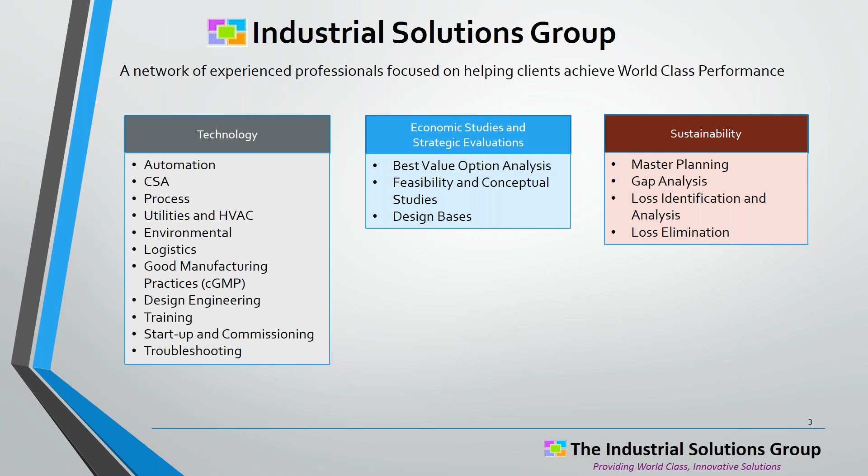Sustainability is one of those words that not many people talked about 20 years ago, but now everybody talks about it. You can't deal with an organization, a government agency that doesn't deal with sustainability, and everybody's got their own definition. I've just put a few on the list.

Many of our customers think in terms of sustainability kind of in the old engineering fashion, where sustainability has to do with reducing energy costs, carbon footprints, water. Certainly that's a part of sustainability, but notice that in the public sector, the definition of sustainability has gotten much larger. People talk about the total employee, community, product safety. United Nations deals with better quality of life for all. National Council for Advanced Manufacturing, of course, brings in the concept of it's got to be economically sound and safe.

So we've endorsed that broader sense of sustainability, but have summarized it in a few bullet points. If you want to be a sustainable world-class manufacturer, you need to do things safely. It's got to be safe for the equipment. That falls into a broad engineering category of process safety, pressure vessels, making sure things don't corrode, that they're safe to operate, that the equipment doesn't damage others, doesn't damage itself.

Employees, industrial hygiene and safety, very important. Many manufacturers have departments for a number of years, decades, that have been focused on employees, and they should. And then, of course, safety for the community, environmental laws, various regulations. We need to make sure that our communities, if we're manufacturing next to them, are safe.

The second broad category has to do with quality. It makes no sense to manufacture products that go out the door with a quality defect. Recalls are very expensive, but potentially even worse than that, defective products can actually cause harm to people. We've had recent examples of the romaine lettuce, potential contamination. So product defects do happen, and it's of utmost concern.

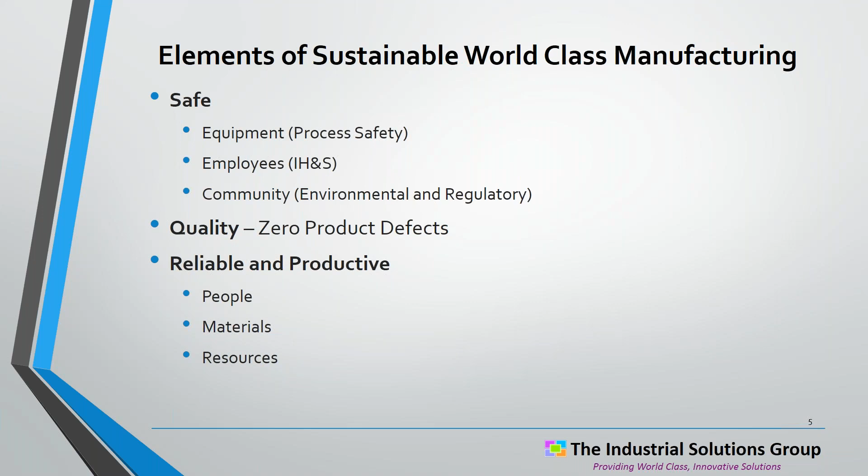And then finally, and we'll be focusing much on this area, reliable and productive manufacturing. And that means that you're optimizing the use of all of your resources, people, materials, energy, water certainly are part of that.

So why is sustainability so popular? I think there are several reasons for it. One, it goes well beyond just cost savings. Sustainable manufacturers provide an image that's very important to a significant segment of the public. It is important to consumers around the world that they know that the products that they're buying are providing optimal use of energy, not warming the globe, etc.

So it's very important if you want to sell products in the public sector that you can check off the sustainability block. Also, from a competitive standpoint, as we'll go through this, sustainability saves money. It increases productivity, it reduces costs. So if you want to have stable manufacturing sites, you need to be able to be competitive. And this sustainability idea is a key way of getting there.

It makes it easier to meet regulations. Folks can get out of the compliance mode and actually meet the spirit of what the regulations mean and be very proactive. And that also sends a very healthy signal to your customers and your employees. It helps you attract good employees. There's a pride in being part of the best. When sports teams get into the postseason, it's hard work, but they have a lot more fun being part of a winning team than being part of the group of teams that are watching the winning teams on TV.

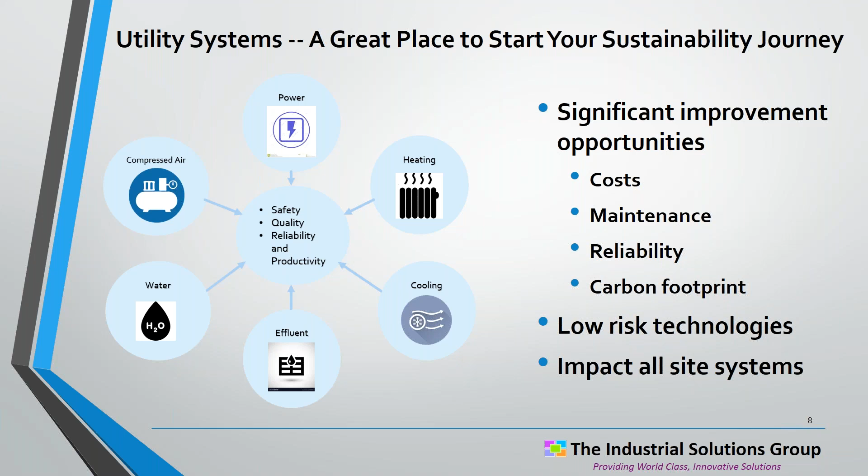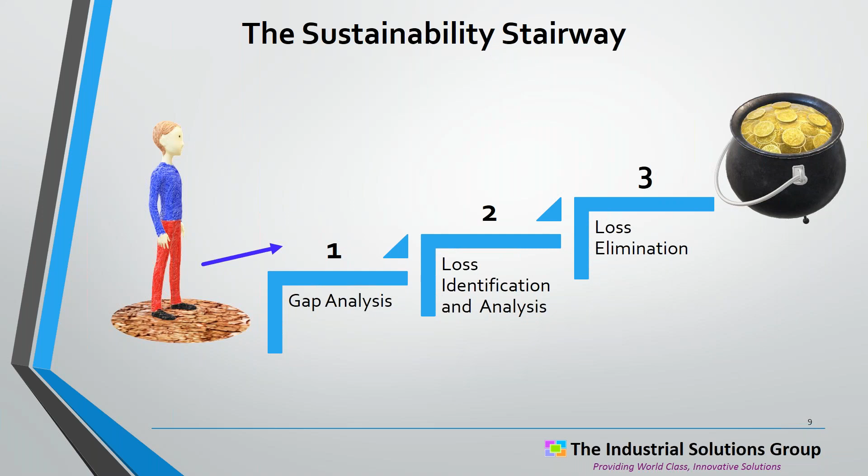So how do we deal with sustainability? It's just a few steps. First, it's nice to know how much opportunity there is - we've referred to that as a gap analysis. Second, once we know what the opportunity is, then we can dig into the losses that are causing this gap, where we're at versus where we want to be. And then third, and the most important step, is actually eliminate the losses. We'll be talking about each of these three steps over the next several minutes.

So let's talk about the gap analysis. Some people refer to this as the size of the prize - we're determining the size of the prize. We know there's money to be made based on our history with utility systems, but is it a little bit, is it a fair amount, or is it a whole bunch? It's kind of nice to know going in, because that helps to set priorities around the plant, helps to focus the teams that are identifying and eliminating losses.

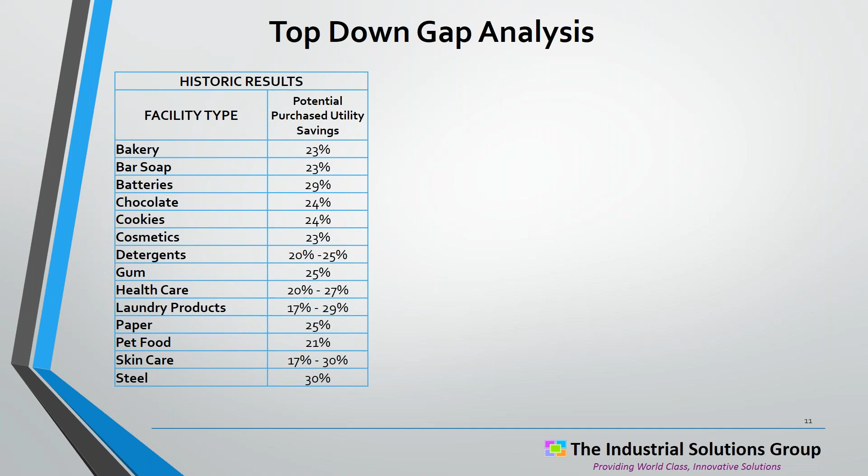And fortunately, you can do this pretty quickly. It doesn't take a lot of effort to get your arms around how big this gap is. I've listed here historic results - we've done dozens of loss analyses for a variety of different companies, and here are some ranges of the typical savings that we will get and we have found. So these are some actual results.

And it's real easy to use this top-down analysis. Imagine you had a paper department that spends $1.5 million per year on purchased utilities. Now if you wanted to, you could add maybe labor, maintenance, and operating costs to that, but we'll keep things simple in this webinar and deal with purchased utilities. Well, you go down the chart and you look at paper, and we said, yep, we do paper, we're seeing about 25%. 25% of $1.5 million is $375,000 per year.

So that's the size of the prize. You might have a little bit less if you've been very active on sustainability, or more depending on what your payout requirements are and how aggressive your company has been at funding sustainability.

So this top-down analysis can happen very quickly. All you need to know is what your current costs are, but the problem with it is it's using some historic averages that may or may not be relevant to your particular site.

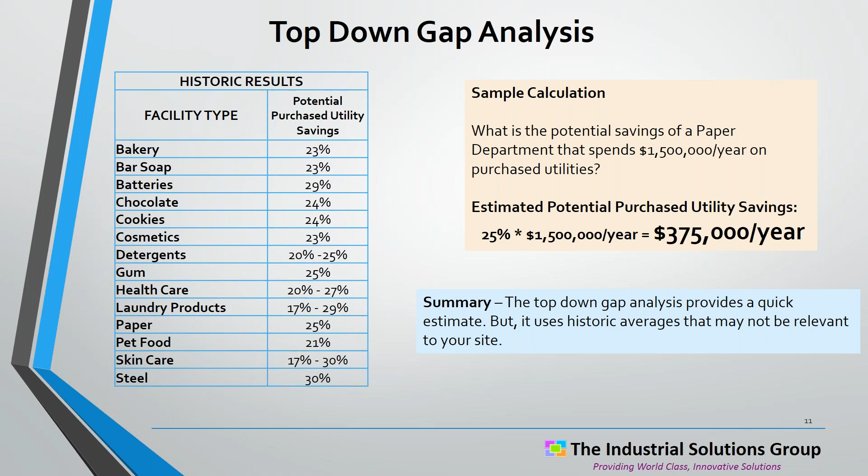So to deal with that problem, I also like to come at it from a bottom-up gap analysis. It takes a little bit more effort, but we are getting some information that's specific to your particular site.

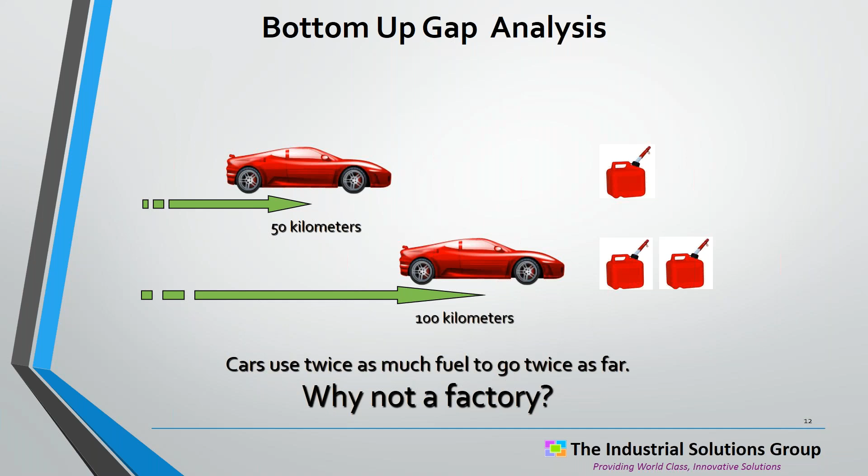So we'll take this in a few steps. Let's say that you have a car and you're taking a trip, going 50 kilometers, and it takes a can of gas to get there. If I drive that car 100 kilometers, I would expect to use 2 cans of gas. Go twice as far, I use twice as much fuel. So in general terms, why wouldn't a factory be the same?

We can graph what we just talked about with our cars. On the y-axis, we look at fuel used - cans of gas, 1 can, 2 cans. On the x-axis, we've got the distance traveled, number of kilometers. You can see that we've got a straight line. If we don't go anywhere, we don't use any fuel - that's down at the 0 point. If we go 50 kilometers, we use 1 can of gas. If we go 100 kilometers, we use 2 cans of gas. So real basic, simple concept.

Part of the concept is how much you use, but I put an X prime point in here to demonstrate how just a little bit of knowledge can start the wheels turning on how to improve your plant, and this starts leading into world-class sustainability thinking. So you could ask yourself, what happens if I take the next trip to the same place?

I go 50 kilometers, but 1 can of gas doesn't get me there. I find out that I used 10 or 20% more. Well, if I'm driving my car and my gas mileage is down, it makes me start to think - maybe my air filters aren't working very well. Maybe I shouldn't have switched to that lower cost brand of fuel that has more ethanol in it. Maybe it's really not that good of a deal for me. Perhaps something else is happening - maybe a brake is dragging.

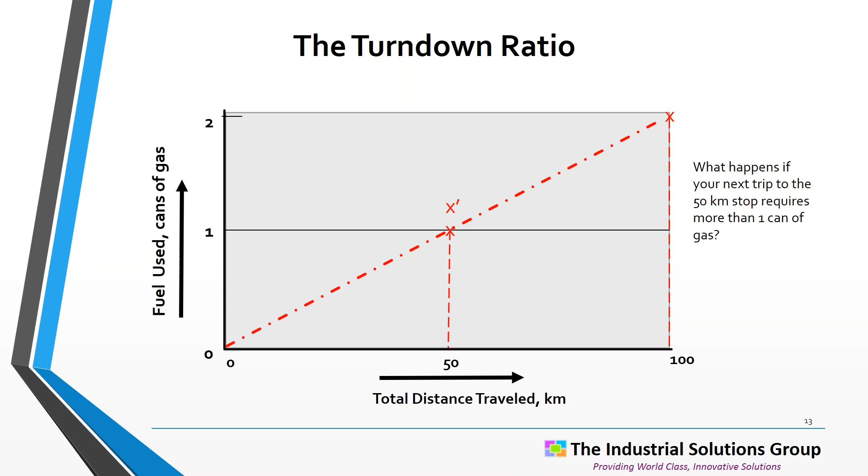And if I can catch it early, an ounce of prevention is worth a pound of cure. I can fix small problems like an air filter easily. But if I go on a trip with a clogged air filter, I might be stranded someplace, and now I've got tow truck charges, I've delayed, and I haven't gotten to an important event on time. Problems can steamroll, and that's what we want to avoid in a sustainable plant.

Before we get into the rest of this bottom-up gap analysis, I need to introduce a couple of definitions. What do we mean by loss? In my definition, we take a very broad definition - if you can't see what you're putting into something as part of the end product, the finished product, then it's a loss. And that actually often happens with utility systems.

It's a very simplified explanation, but think of many of the manufacturing plants you've been around. The raw materials come in at ambient temperature, the finished product goes out at ambient temperature. What happens to all the fuel that you put into a plant? There's not more energy in the finished product. All the electricity - you can't see that in the finished product.

Instead, our utilities kind of act like processing aids, catalysts. We can't consume them - we don't consume energy, we don't consume water. So what we do is use it for a while, and then we're very efficient at discharging things through stacks, cooling towers, drains. We have a lot of ways of getting rid of this energy we can't use, and we'll be talking about why we get rid of it and when's the right time to get rid of it.

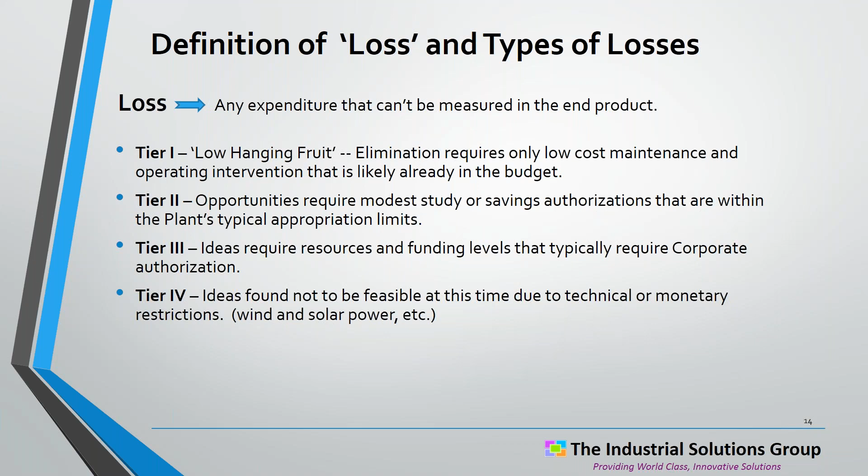When we go through, we also will classify some items as tier 4. Clients will say it's got to pay out in 2 or 3 years. Well, there are some good ideas out there that might be good for a university that's willing to accept 7 or 10 year paybacks, but aren't working quite as well in a manufacturing facility because without government help or some big breakthrough in technology, they don't meet requirements. We'll throw those in tier 4. We don't like to throw them away because we never know when a new law might be passed or something that would bring those tier 4 items back into the realm of feasibility.

We can talk about this turndown ratio, what we were just doing for the cars, in terms of a manufacturing plant. Instead of cans of gas on the y-axis, I've put utility usage units - could be kilowatt hours, millions of BTUs, gigajoules, or cubic meters of water. On the x-axis, we have production units. Everybody knows how much they produce every month - 4,000 widgets, 8,000 widgets.

And then we can look at the past 12 months of data, and we can plot those on an XY graph. One thing you may notice - remember we had this nice straight line when we were dealing with our car example - this is a typical scatter that you might get from your plant when you do this. Everything doesn't usually fit on a straight line. It's unusual that it fits on a straight line, but each of these would be real data points.

Notice there's one data point right here that, if we had a line from the 0,0 point and started rotating it up, this plant - with all of its existing equipment and all its existing production - proved to itself and its people that that month was a very efficient month for whatever reason. We don't know why, but without spending any major capital, that plant can operate there.

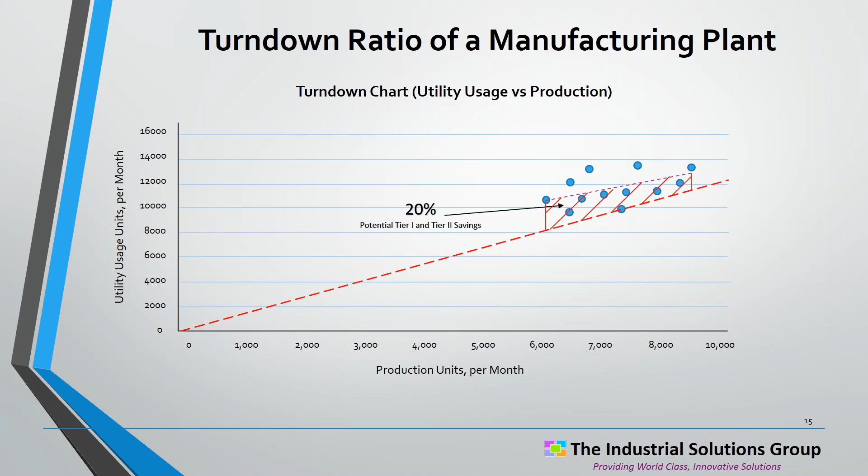So tier 1 and tier 2 items - this is kind of a picture of the kind of gap. Again, we don't know exactly what the problems are that are causing the gap, but we can see a picture here that this plant has some opportunities.

So we can take this a step further and do a little sample. Let's say this plant's production schedule for next year is 6,500 units per month. We can work through and use this bottom-up gap analysis to ask, what's the potential savings? How much would I expect if I went through this loss process?

Now I'll give you a couple of hints. We find that just because there's a gap, it doesn't mean you can get 100% of the way there - we usually divide that by 2. So we'll take those tier 1 and tier 2 savings and say it's pretty reasonable to get halfway there. If we're aggressive, maybe more. If things fall into place, maybe even more. But it's really hard to be perfect - though we don't have to be perfect to see some pretty significant savings.

And we also find that with tier 3 items, what happens is we can rotate this graph downward, so that we can get as many tier 3 savings as we can tier 1 and tier 2 savings.

Pretty easy calculation now. So at 6,500 units, the difference between the upper trend line and our ideal line is 11,500 units of utilities instead of 9,000 units. That's 128% of ideal. So we take that 28%, divide by 2, and add another 14%. Tier 3 equals tier 1 and 2. So it looks like that plant may have potential on that particular utility system to save about 28%. It's a good place to start.

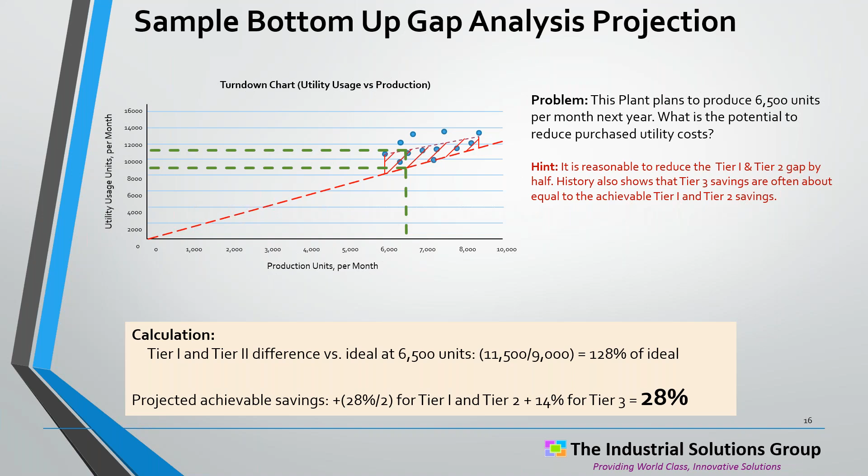So let's get into the loss analysis process. It's a 10-step process. First, we need to assign a site leader, identify the systems. We usually break it out, look at 10, 12 systems or so. And then we will select a team for each system, develop a treasure map that tells us how much money is being spent on each system.

And then it's an interview process. So we have teams, 3 to 5 people, on the steam system, on the HVAC, the others, and we'll spend a couple of hours in a room. We'll tour the systems, start getting ideas on changes that could be made to reduce cost. Then there's a period of quantifying the losses, revising, reviewing with folks, and developing an executive summary that gives a very detailed map of what the losses are and what the costs are.

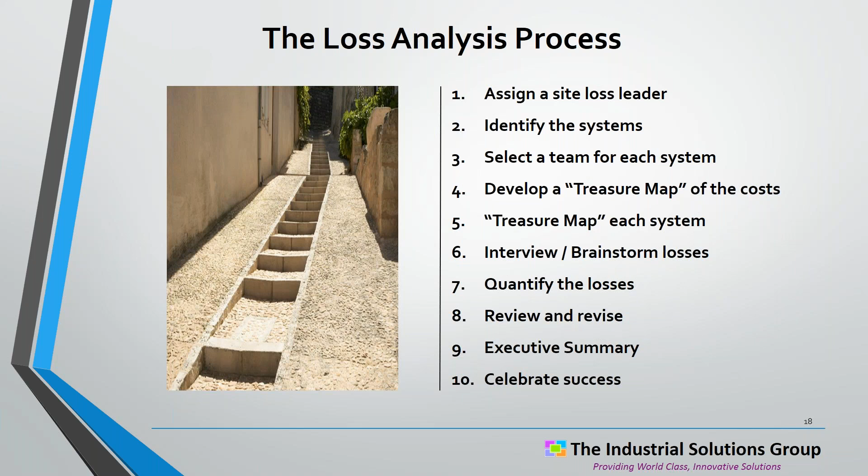And then it's very important to celebrate success. These are ideas that are hard to visualize, and a little pat on the back, a cup of coffee, something that says, hey, I appreciate the work done, goes a long way with building the morale that we're after with sustainable plants.

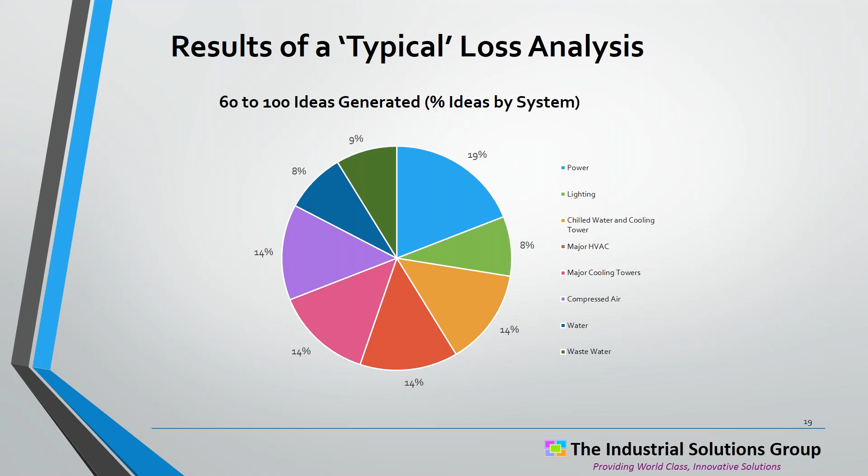Here's a pie chart. This actually came from a project that we did last year. It's pretty typical. Where are the opportunities? Every system has opportunities. 60 to 100 ideas, pretty typical.

So where do these savings come from? How is it that we put in systems, and we've done loss analysis on plants that are 3 years old, and where does the savings come from? I wanted to share a few keys from the technology that have helped me over the years to understand why we could get 25 or 30 or even more percent on some systems.

The first has to do with quality, and I'm not talking about quality of equipment, quality of people, or quality of training. Here, it's a thermodynamic principle. I'm dealing with quality of the energy or quality of the water that we are using. Many of our plants are set up so that it's easier to use higher quality than lower quality, and we don't worry about this at all.

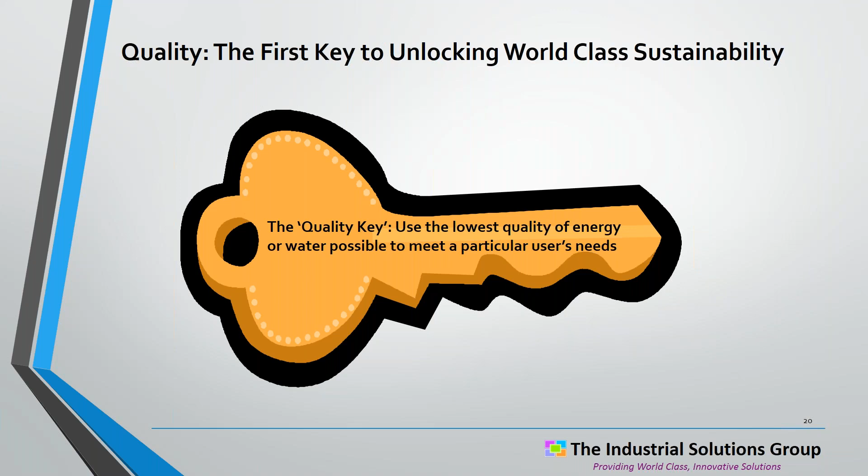But in terms of energy, you can start thinking through this. By higher quality, you mean higher temperature. Why is that higher quality in terms of thermodynamics? It's higher quality because I can do so many things with it. I can make electricity with it. I can use it for high temperature process heat. I can use it for all kinds of things, even the very low temperature users.

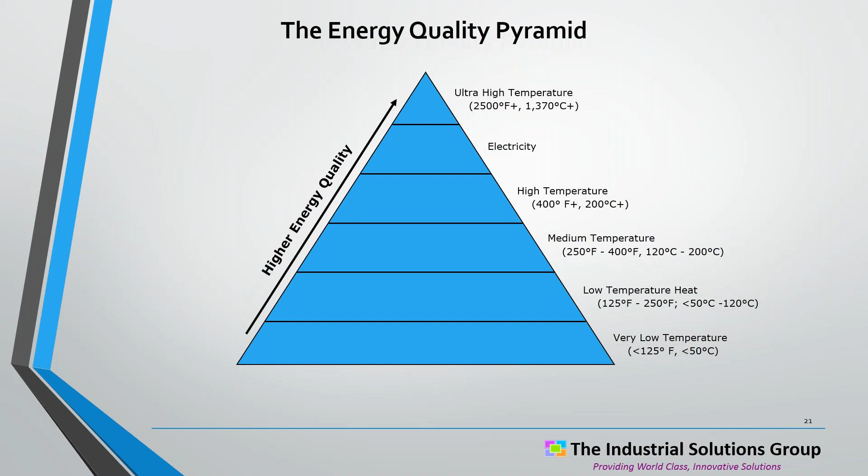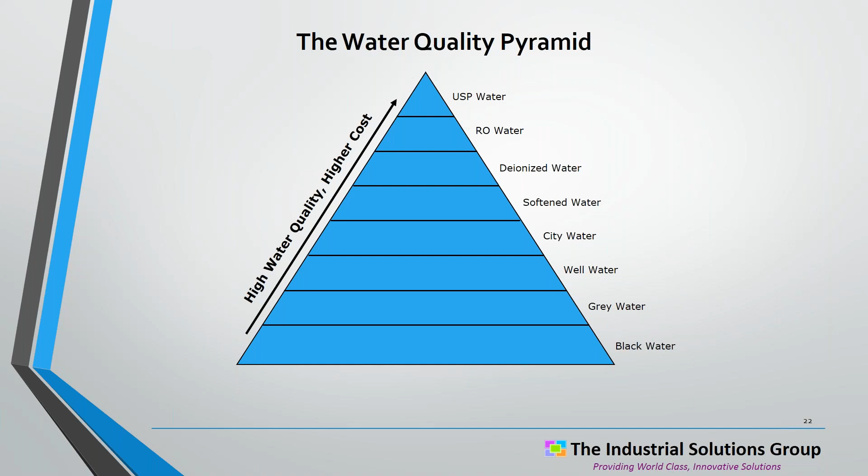I've got the same kind of thing going with water quality. We bring water in off the street. It's city water quality - we can drink it without becoming ill. But it's not nearly as good as it needs to be in order to make steam out of. And if you need a CGMP plant where we're doing pharmaceutical grade or other CGMP critical products, you have to go all the way up to USP water, virtually pure - no minerals, no bacteria. Quality becomes very, very important on the water side, because higher quality is going to cost you a lot of money in equipment and operating costs.

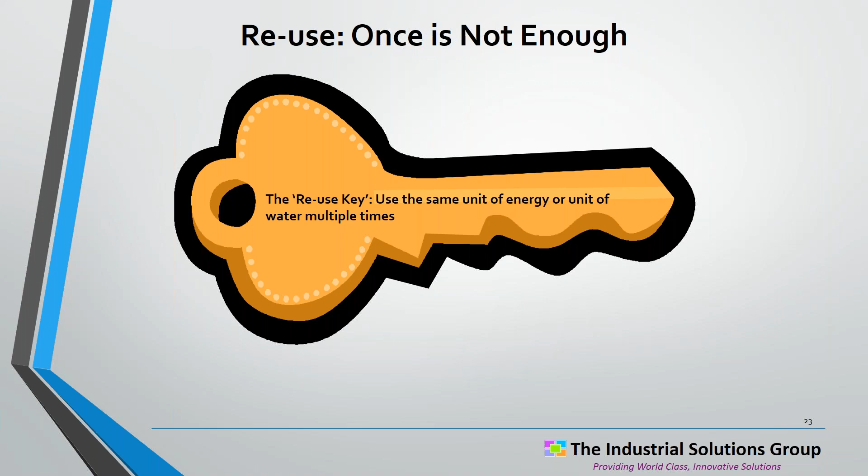The second key that comes to play that we think a lot about when we get into sustainability is the reuse key - once is not enough. We think of consuming gas, natural gas, like we're heating in the oven and it's gone. But we know that it isn't gone. Where it is, it comes back at lower temperature, so the quality has gone. So we can actually reuse the same unit of energy multiple times. We can do the same thing with water.

Let me show a little staircase here on the energy side. So with ultra high temperature - this is 2000 degree, 2300 degree - this is natural gas, fuel oil flame temperatures. I can run that through a gas or steam turbine, steam turbine of course with a boiler, and I can make electricity out of it. And then I am going to have discharged very high temperature exhaust. I can use that for specialty process heating.

And then that product is going to be warm. I can reclaim heat from that. I can get down - I can actually make chilled water out of heat using absorption refrigeration. And then at the 140, 75 degree or so C temperatures, that temperature is really good for using for raw material warming, domestic hot water.

Think about the buildings we heat this time of year in the Northern Hemisphere. We're only heating to 21 degrees Celsius, 70 degrees. I can't go down a highway anywhere in the world in the winter without seeing a cooling tower operating, throwing away basically 100-degree heat, which is more than adequate to heat buildings with.

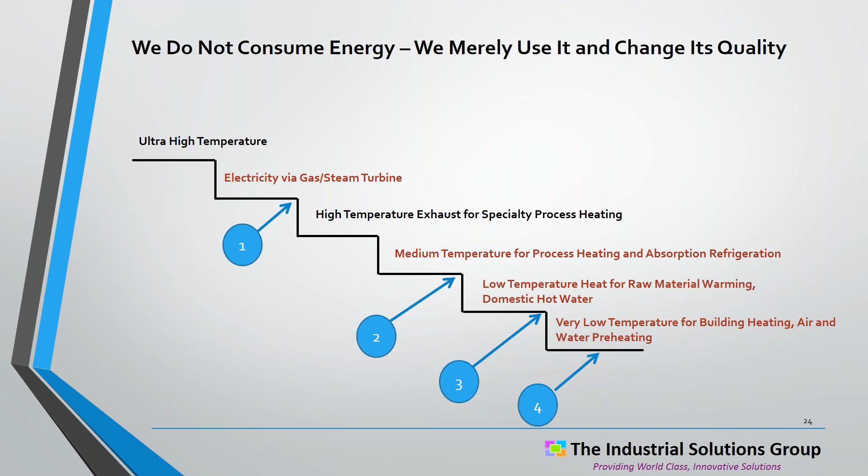So if you do a really good job, you don't use energy once, maybe you use it twice. Some plants do use it once, twice. With cogeneration, you can start getting into even better numbers, and there are plants around that have been operating a number of years using energy multiple times.

You can do the same thing with water. And that's the final key. I would talk in terms of the re-empower key, where we don't want to throw away low quality energy and water. Sometimes we just give up too quickly. We could use heat pumps and reclaim the heat again, and use it another time. We can do the same thing with water.

Good filtration systems, evaporation processes. There are other ways where instead of just discharging the water to the drain, it might be economical to clean it up and reuse it one more time.

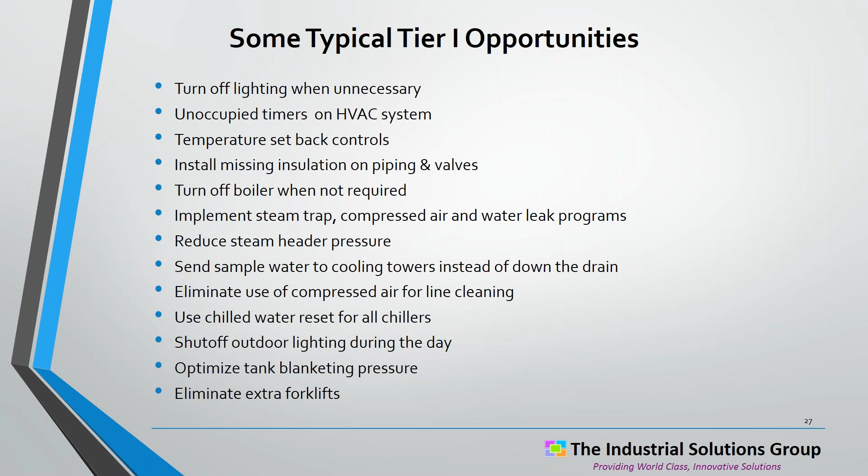A lot of this has to do with how the teams are organized to look at things. When we get into these leak programs, a lot of times we find that even very skilled technicians don't know what a leak costs, or what missing insulation costs. So a lot of times simple fixes just don't make the radar screen.

I'll give you an example on leaks. Here are three different charts: cost of a steam leak, cost of a water leak, cost of a typical compressed air leak. We can start with a small one—a 1/8 inch leak, that's 3 millimeters.

That steam leak costs $3,800 US per year. For water, you're not just losing the water, you're also getting billed for the sewer—again a 1/8 inch, 3 millimeter leak, $691 per year. Compressed air is a very expensive utility; the same size opening is near the cost of steam, at $3,400 US per year.

So leaks are very expensive. What does it take to fix them? Well, that steam leak you see in the top picture is obviously a gasket that needs to be replaced. At $3,800, a good technician can shut down the line, find some dead time, maybe work on it in the afternoon, put in a few hours of work—work that's probably already budgeted as part of the maintenance budget—and it pays out in virtually a couple of days. Very, very quick paybacks.

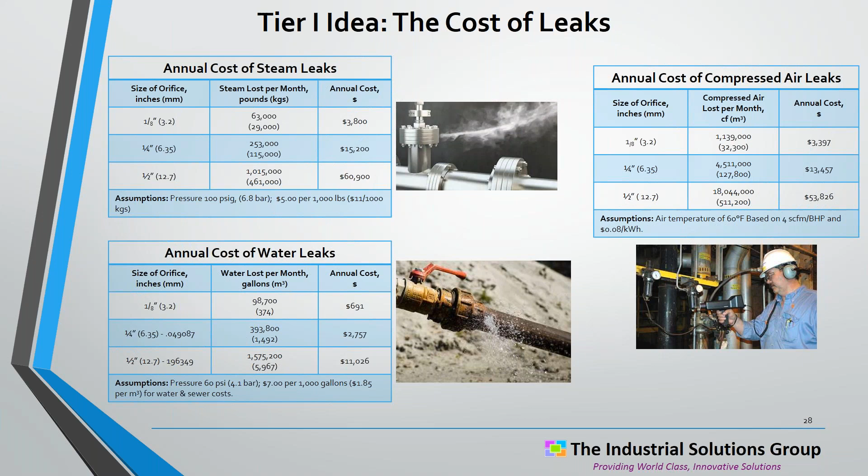Sometimes for compressed air leaks, you see the technician using an ultrasonic gun—it's the best way to find compressed air leaks. Fittings come loose, and that same technician who identifies a leak could actually fix it as he's going around identifying them.

You can also look at leaks in terms of the total plant. Here's a plant with 4 air compressors and total installed capacity of 5,000 cubic feet per minute, or 8,500 cubic meters per hour. During peak production, this plant runs all 4 air compressors. That, by the way, is probably a tier 2 opportunity—if you can only get by with 3, you'll find that's more efficient. But for whatever reasons, they're operating all 4 compressors now.

But I really wanted to focus on this last case. On a holiday or weekend, you have no production, but you want to keep pressure in the lines. Most plants do this—they have some instrument someplace that needs a little bit of air, even on a down day, maybe to keep temperature transmitters working or control valves modulating properly. But those tend to be small users, and in this plant they're running just 1 air compressor. They've done a good thing: they've turned off 3 air compressors, but they're running 1 air compressor at 3/4 load.

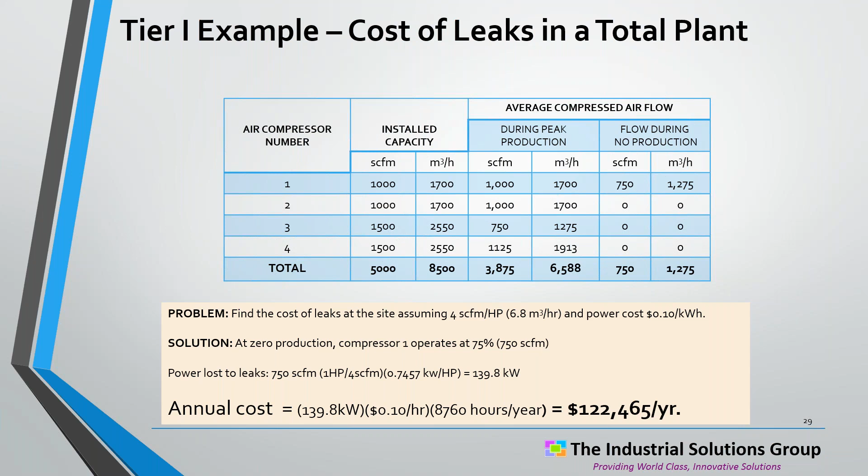Have been doing it for years. The trouble is those leaks are happening even during peak production time. So that 750 CFM nominally is happening 8,760 hours per year. And the typical air compressor uses 1 horsepower for every 4 cubic feet per minute it produces. If your power costs are 10 cents per kilowatt hour, some plants more, some less, that's 140 kilowatts the air compressor is using, and the annual cost of leaks is $122,000 per year. So a leak prevention program probably makes sense on some frequency, and you can test your way into whether you do that once a month, once every 2 months, once every 3 months.

Here's a list of some sample tier 2 ideas. Remember, from the definition, these are a little bit more complex. You have to spend a little bit of money. LED bulbs are a little bit more expensive than T8s. And maybe we're in the habit of not having good metering, so we have to buy some meters, but with good metering and good billing practices, that can save a few percent on water bills, on electricity or steam bills.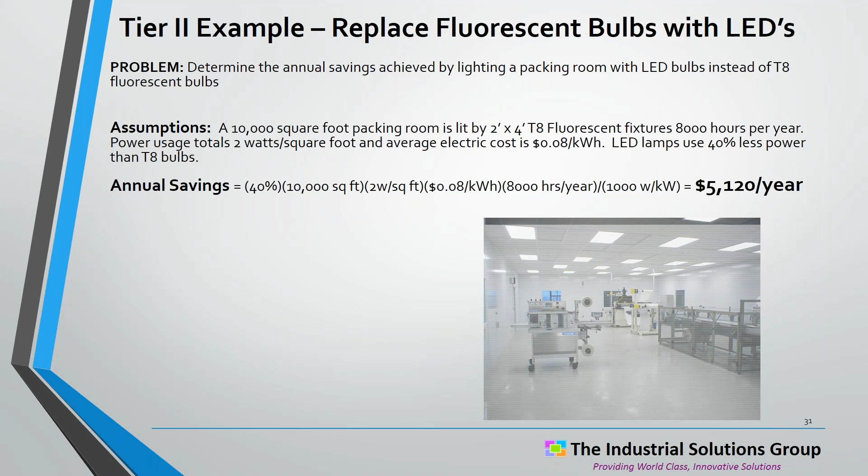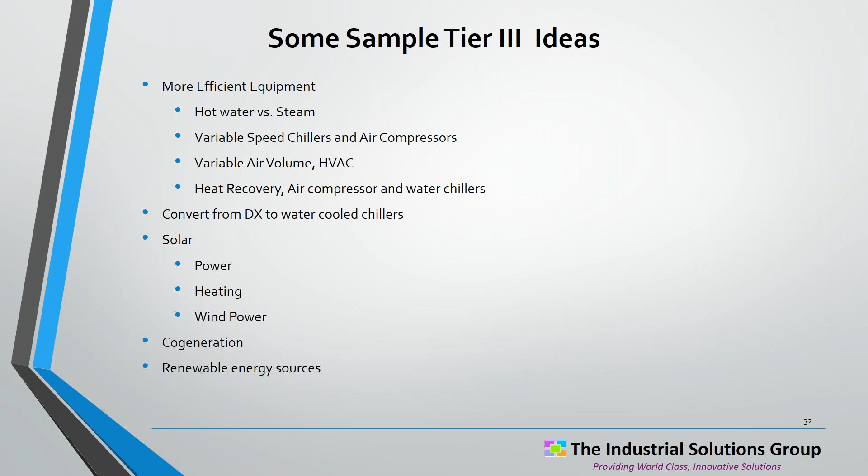And then we've got tier 3, and these are the bigger hitters. Again, chances are I need to get some appropriation outside of the plant in order to do that, but it's very important to do if you want to become world class.

And here's an example. You see these air conditioning boxes all over the place on department stores, on warehouses, on manufacturing plants. Those 2 units that are shown kind of look alike, but they're very different in how much energy they use. The unit on top is transferring air, like your home air conditioner, directly to the outside air that can get very, very hot on summer days, particularly on top of a roof. The unit on the bottom is water cooled, and it's getting its chilled water from a chiller that's discharging through a water-based cooling tower system.

Well, it turns out when you do that, it's a lot cheaper. A chilled water type system that's water cooled only uses 0.7 kilowatts per ton of cooling, as opposed to 1.1 kilowatts per ton of cooling for the DX unit. So if we had a 200,000 square foot building that was requiring 250 square feet per ton, which is a good average for a lot of non-heavy duty office or manufacturing space, space that's using high percentages of outside air would even have a higher air conditioning load.

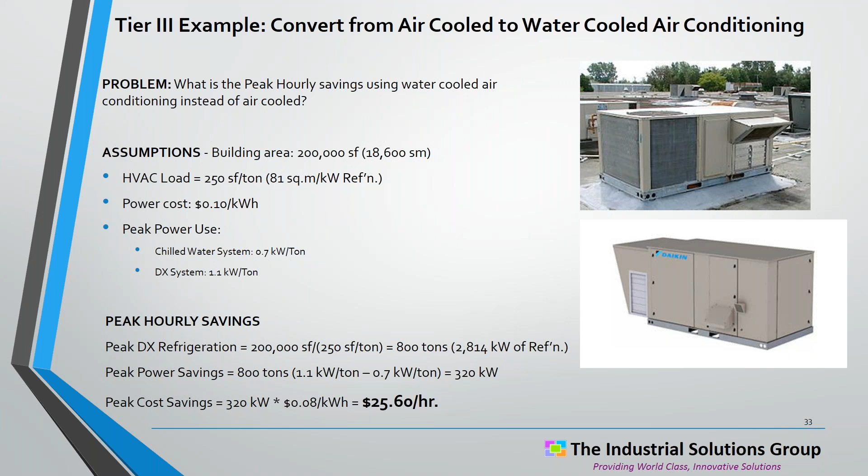It's interesting to me that many plants have invested in water-cooled chillers, but then at some point, from a sustainability standpoint, will stub their toe a little bit and will actually start throwing in a DX unit here or there to save a few bucks on a little bit of chilled water piping. It always makes me wonder if they've really got a good understanding of what's happening to their system, and that they're starting to veer off from a more sustainable design to a less sustainable design.

So let's talk a little bit about the loss elimination process. Again, most important step. Unfortunately, you can't get to this step without doing step 2.

I like to think of loss elimination in terms of it's really an organizational challenge. Somebody has to decide, the leadership of the company, the plant manager, that sustainability is an important objective, and that plant leadership team is really a focal point, because I know plants get hit with so many requests, changes in production required, changes in product level. It is very easy for any initiative to get sidetracked. And without this steering team led by the plant leadership team, keeping focus and making sure that sustainability is the top priority for the site, it can really start losing traction.

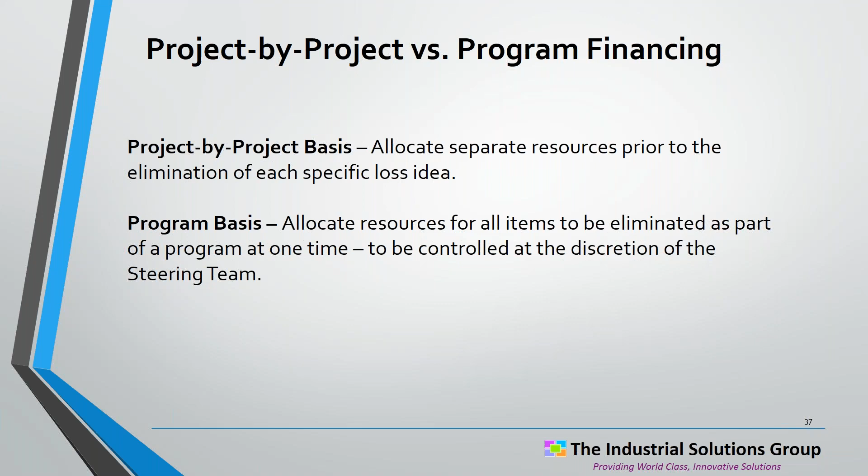But with the program here that we've laid out, this sustainability program, I've also seen a lot of merit in looking at it as a total program that we want to finance, so that we aren't just going after each of these little ideas one at a time, because the paperwork can really become very, very challenging. So in a project by project approach, we would allocate separate resources prior to the elimination of each specific loss idea. On a program basis, though, we would allocate resources at one time up front. It's a multi-year program, 2 years, 3 years, 4 years, under the direction and discretion of the steering team. So it gives the team some flexibility as long as the results are there.

And I wanted to go through a little example, because it gets to the heart of, hey, this is fine and good, all these savings, but how in the world do you pay for them? And the answer is people are doing sustainability because it's the low-cost way of operating, if you think about it that way. So here I've got a little chart. On the y-axis, I've got US dollars. This is the cost of systems, the cost of what the utility is going to, or all of the utility systems in a plant. And then I've mapped out 10 years here.

We're going to go through 4 different scenarios. Scenario status quo says we don't do anything. We just keep going on, inflation 3% a year. We're going to spend more money year after year on utility systems, not worry about it at all. Base program says let's knock off the easy stuff, that's tier 1 items. We can add tier 2 items, and now we've got a competitive program. Or let's go for the whole ball of wax, let's see if we can't go towards world class and bring in some tier 3 items as well.

So we'll go through these scenarios. There is status quo, tier 1, without any savings opportunities. This is the glide path that a plant might be on currently if they're not doing anything. And most people are doing something.

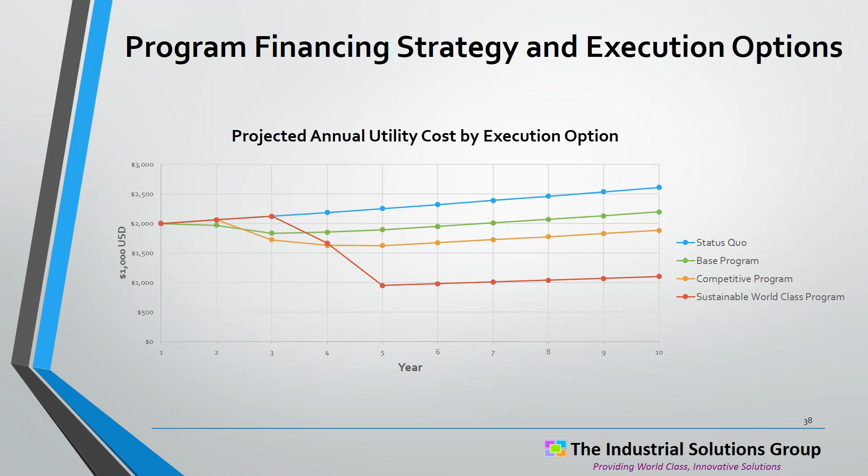We can talk in terms of net present cost and net present savings over a 20-year period. This is the equivalent of bringing all those cash flows back into current dollars by deducting out or factoring out a before-tax discount rate. Notice in the status quo, a 20-year net present cost, if we keep mapping out that curve for 20 years, that would be the equivalent of spending almost $25 million today.

If we do the base program, we can knock that down to about 22 million with a big savings, 10% savings. Competitive program, we're less than 20 million, and the savings increase, and then look what happens with the sustainable world class. So in terms of what's your cost today, in terms of net present cost, and this is a measurement that many financial people use and understand well.

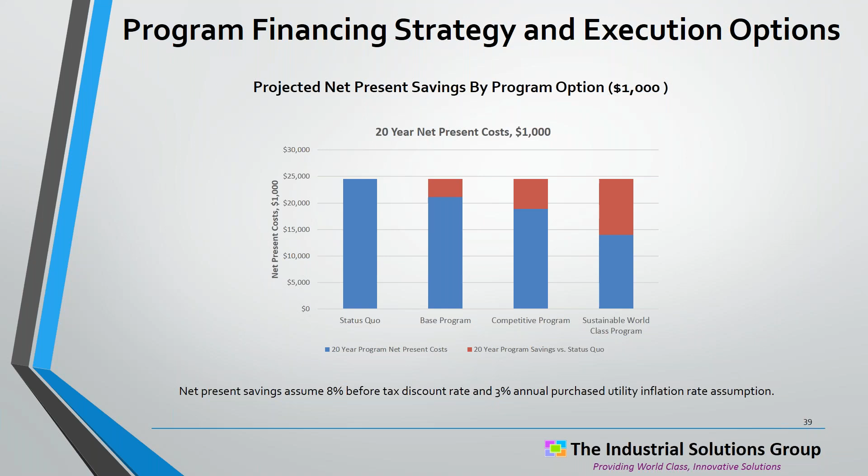Well, this is the low net present cost option by a lot, $10 million less. It can be very good business, and that's why you see so many companies, Walmarts of the world, Pepsi's, Procter and Gamble's, others, very interested in sustainability programs. A lot of consumer benefit, and it pays.

So in conclusion, you don't have to start with utilities, but I think it's a pretty good place to start because the technology is well known, we can wrap our minds around it. A lot of times we can get help from local utility systems. Governments, sometimes they get very generous, they'll give you tax breaks, investment tax credits to put in things like solar and windmills and other things.

So a lot of people want to help in this area, and you aren't in it alone. And there's a lot of literature, and a lot of technology and knowledge out there that can help you go. So it's maybe a little bit easier to wrap your mind around than some of the other systems. And as we talked about, 20 to 30%, pretty easy. If you start getting up into cogen, then even larger numbers, because you're taking advantage of using energy more than once, 2 times, 3 times, and the savings can become pretty significant.